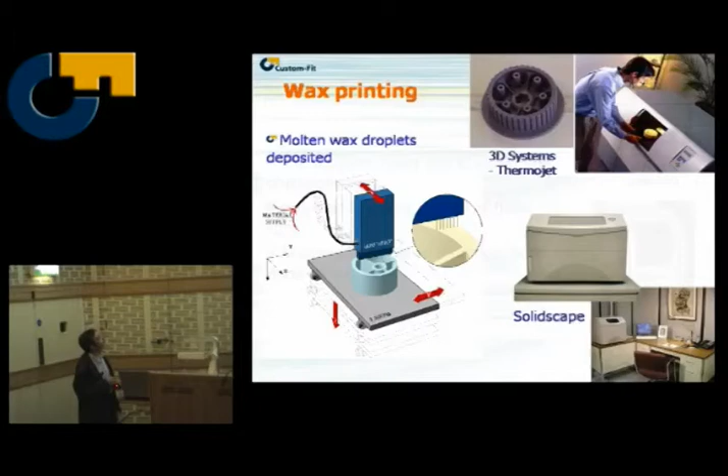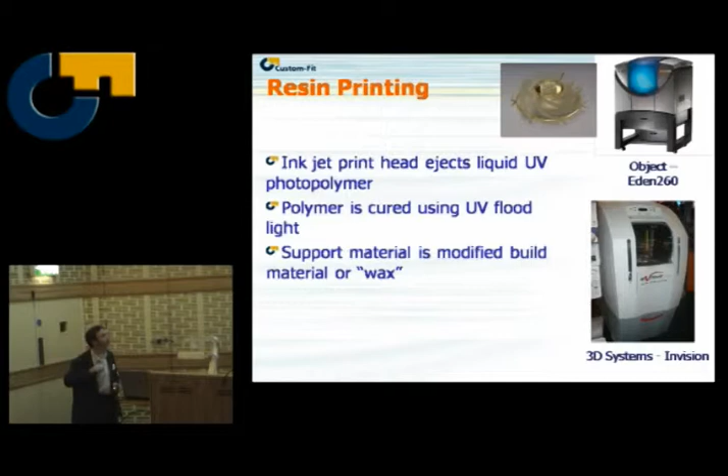Resin printing machines - there's a range of resin printing machines, both from 3D Systems and also from an Israeli company called Objet, no C in that title. That prints a resin but cures it with a UV light, so every time you print your material down, you UV cure it. The support material is a slightly modified resin, probably not wonderful on material utilisation.

Another process is the Perfactory machine. Some people doubt, is it a rapid manufacturing machine? Well, it can be - I think it potentially could be, because it's using a projection system to project a pattern of light onto this. You can see here there's an actual platform that's upside down, so the part grows upwards that way, and you feed more resin into this shallow vat as time goes on. So it's projecting an image, not dissimilar to the image on the screen, using a similar projection system to the one up there.

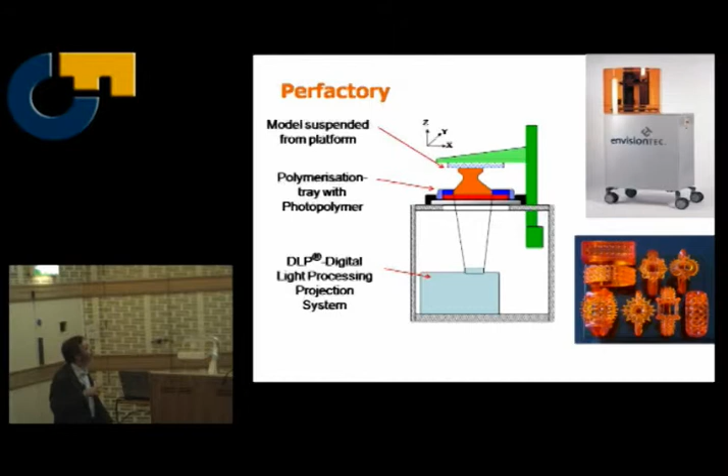It cures an entire layer one at a time, and it allows you to build multiple parts, very complex parts, quickly. There's a whole range now of materials being developed. If you're into casting jewellery, then it is a rapid manufacturing machine. If you're into making hearing aid shells for customised hearing aids, then yes, it's a rapid manufacturing machine.

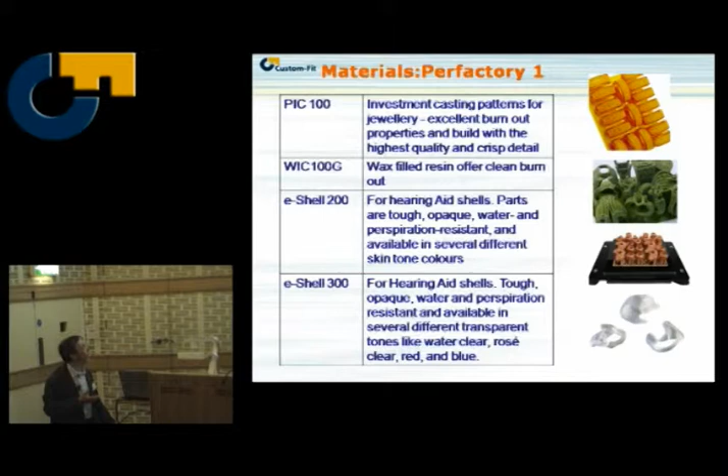They show examples also of larger parts. I will caution against this - my experience with the Perfactory process is it's great at small parts, but big parts, it's a disaster. Don't tell EnvisionTEC I said that, but I don't rate it as a way of making big parts.

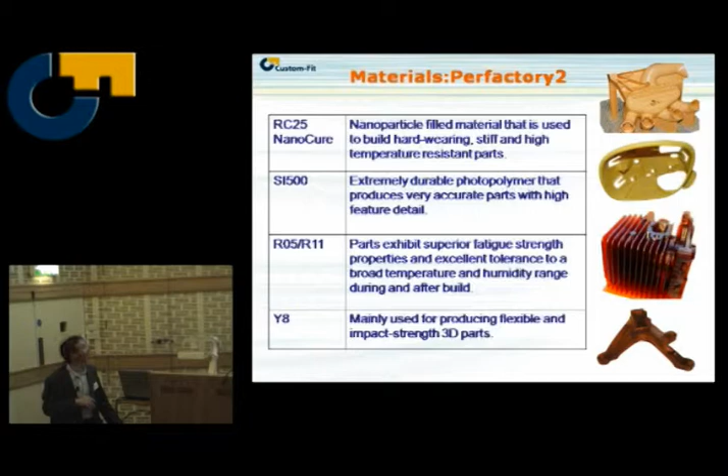We'll now quickly talk about the process being developed within the custom fit process. What we're trying to do is migrate from standard RP processes to faster, better materials, functional grading, to satisfy the requirements of rapid manufacturing.

The first process was actually developed by SINTEF, and Klaus knows more about this than I do. It's a process of metal printing.

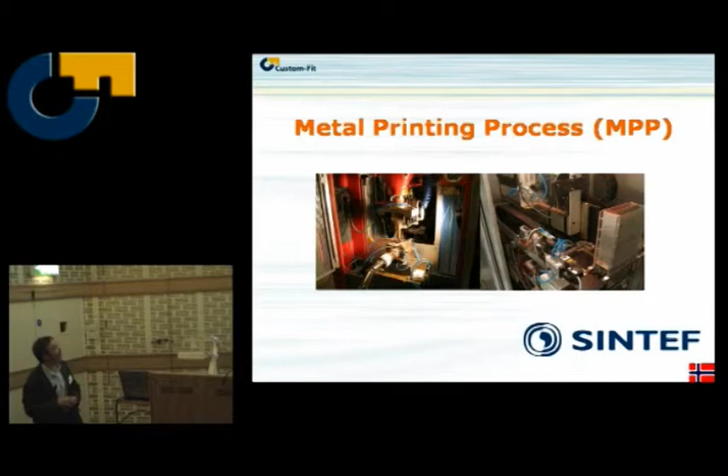The process works by taking a metallic powder and electrostatically printing it or picking it up onto a plate. You can see there, that's the powder, it's picked up onto this plate. That plate is actually a punch that pushes down into a furnace and fuses that layer in a few seconds. So there's your printed layer, there's the punch, and it goes into the furnace. It's an amazing process - a little localised furnace. The door whips open, in it goes, fuses, comes out, the door closes again.

It's an inert atmosphere in there, so you don't get oxidation, and you can produce a part that's a combination of - is this iron? Iron and copper. You name another process that can do that combination - not many, is there? We've got a solution to a problem we have to find, I think.

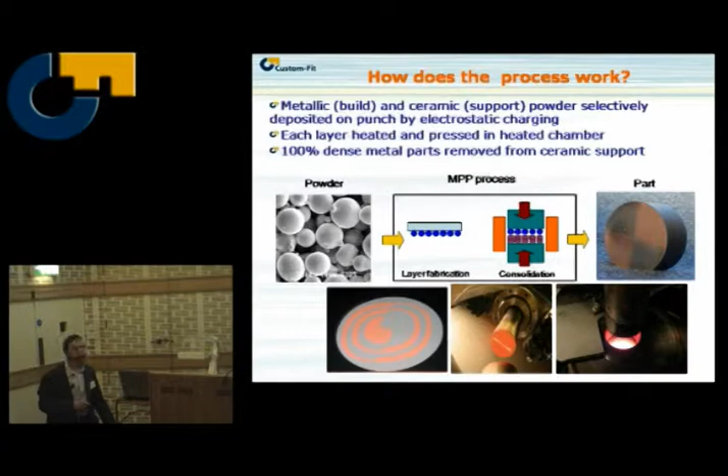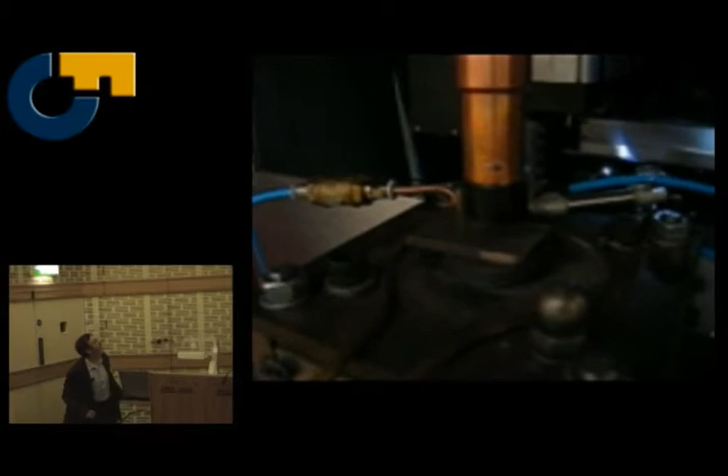This is the video. I've been told how to do this. And there's probably sound. You all see that? That's the punch, and in it goes.

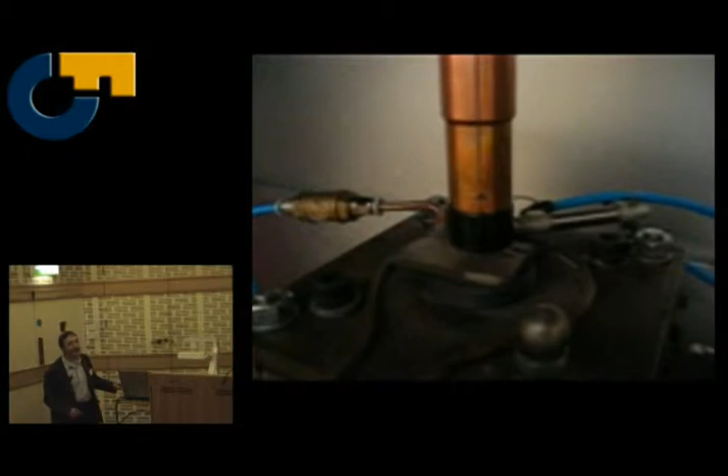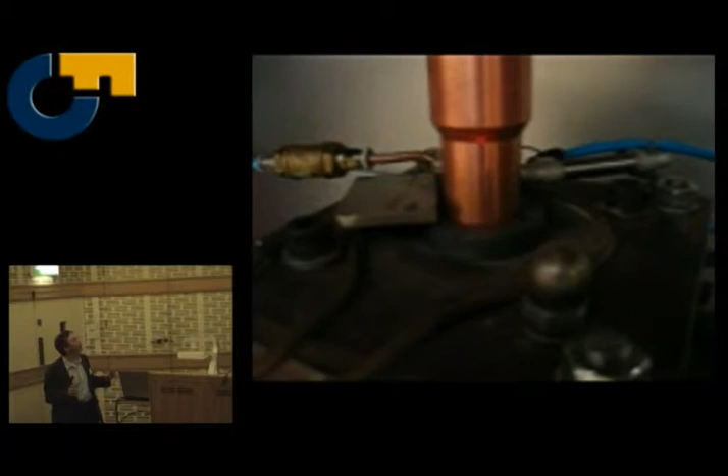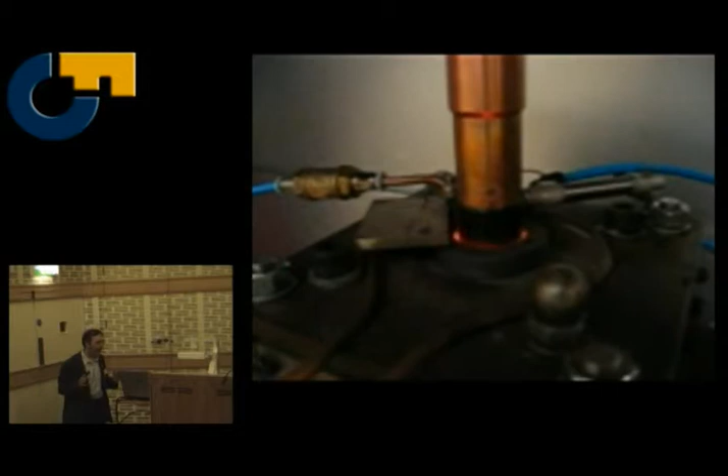It would be fair to say the process needs a little speeding up, but the principle is there. This is a demonstration, and this is not slowed down - this is real time. But the elements are all mechanical elements that can be quickly speeded up and then closed again. So that's a layer at a time. There's lots of discussion about whether it's better than laser sintering - it's a different approach, and it allows you to get functional grading.

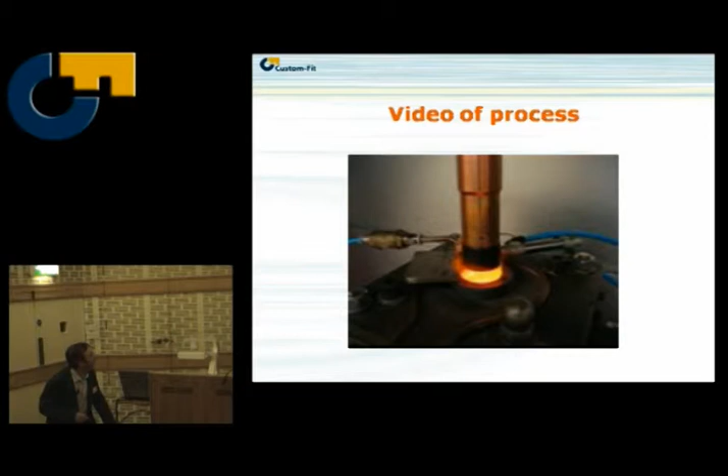Okay, so that's the sort of things you can do. There's been some materials research - Klaus will explain more about the material - but things like cobalt, chrome, titanium, iron, copper are materials which have been tested, and also this functional grading from 100% titanium to 100% cobalt chrome.

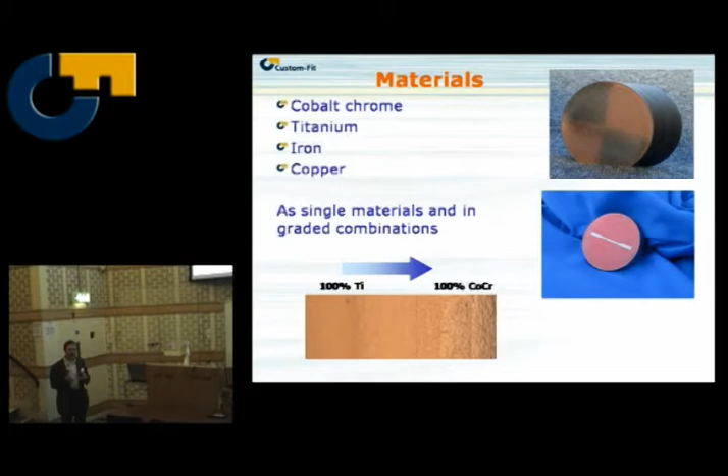This is something we've talked about, but actually now seeing it in real life - high viscosity inkjet printing from TNO, an organisation that Youngman used to work for. Very impressive machine.

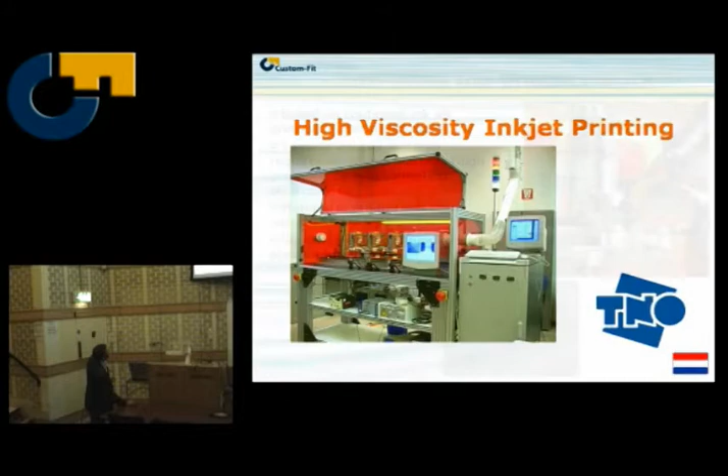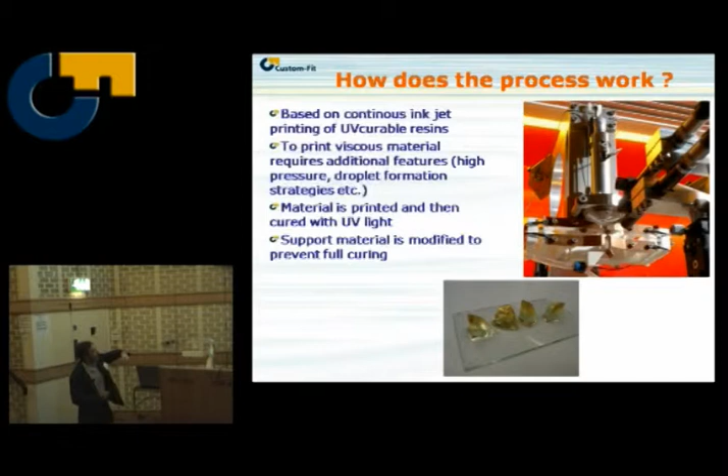What it does is use the continuous inkjet printing process, but with very, very viscous materials. One thing - and this is the critical part of the patent they have - it allows you, once you've printed this viscous UV resin, to then cure it to make samples.

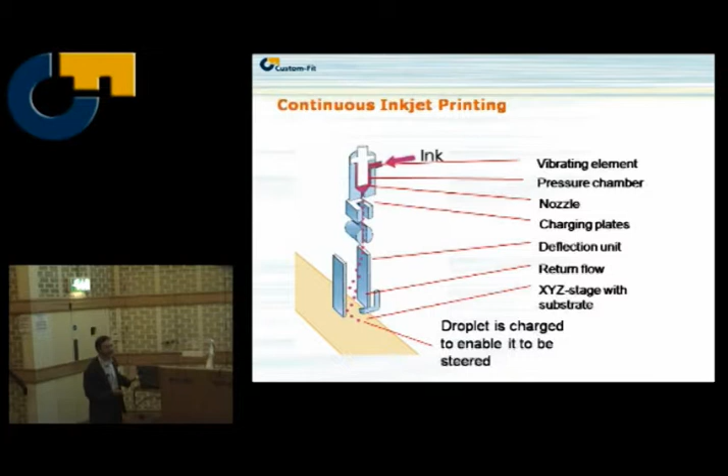For those not familiar with continuous inkjet printing, you can charge the droplets and steer them. It's a faster process than drop-on-demand, which is the standard desktop printing system. But it is quite technical - not easy. That's the machine, hopefully it will move forward.

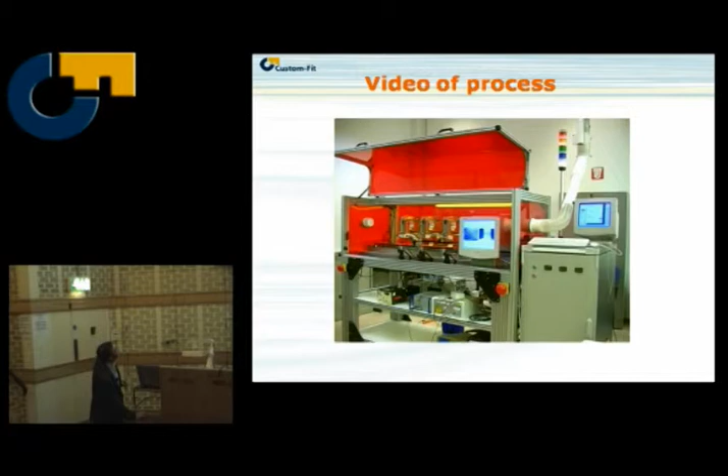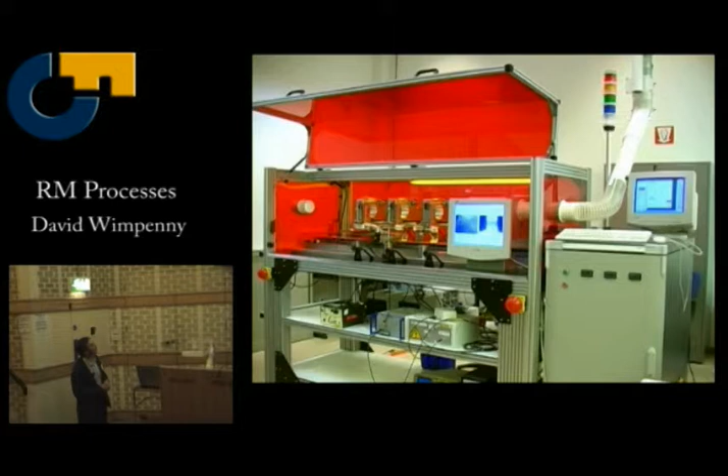Yeah, okay, that is real time. So that carriage is going backwards and forwards, going under 3 inkjet heads, and then it's curing and going back again.

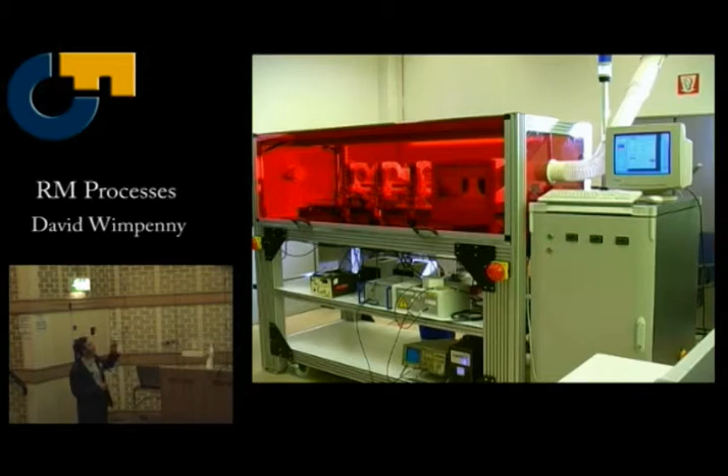This suffers from the problem of being too fast - you actually can't see what's going on. But there's a stream of droplets from every print head. The reason for multiple print heads is we want to be able to put down two build materials and the support material.

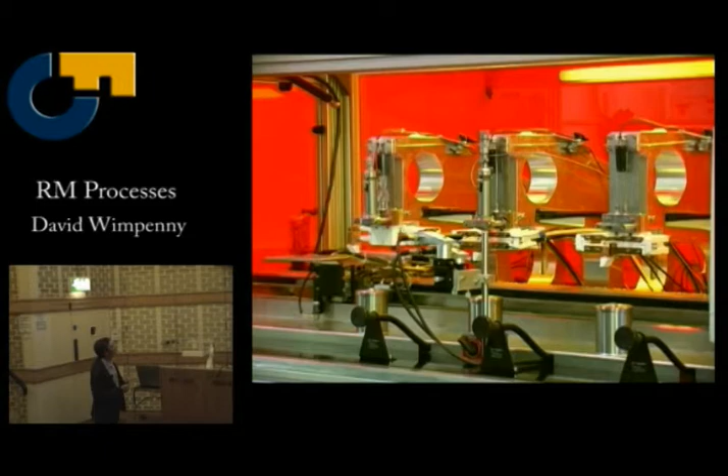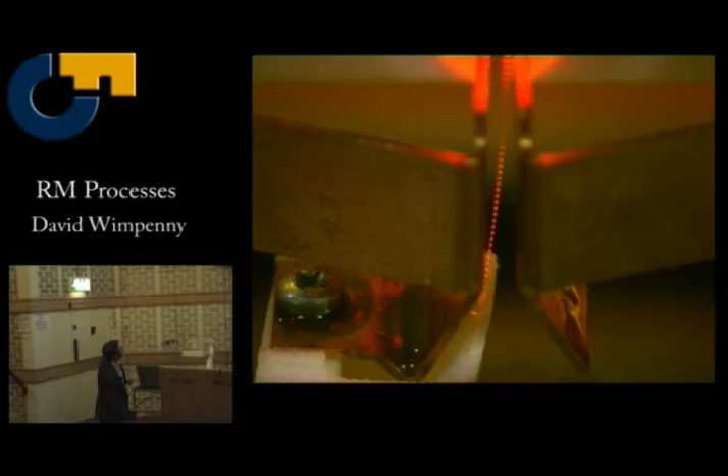That's been developed within the Custom Fit project. The critical issue is how they deal with this very viscous material, and they've got their own control software. That's the stream of droplets coming out of the head and how they steer it. As I say, it's not for the faint-hearted.

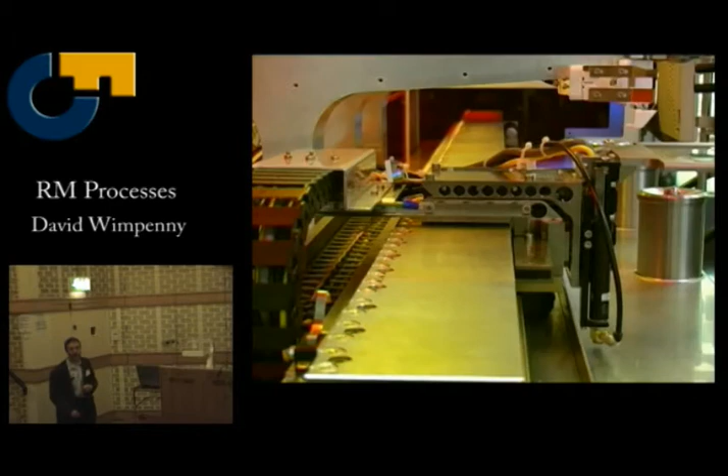Drop on demand is fairly simple - you squeeze a droplet, it flies and it hits the substrate. This allows you to do some fairly strange things mid-flight.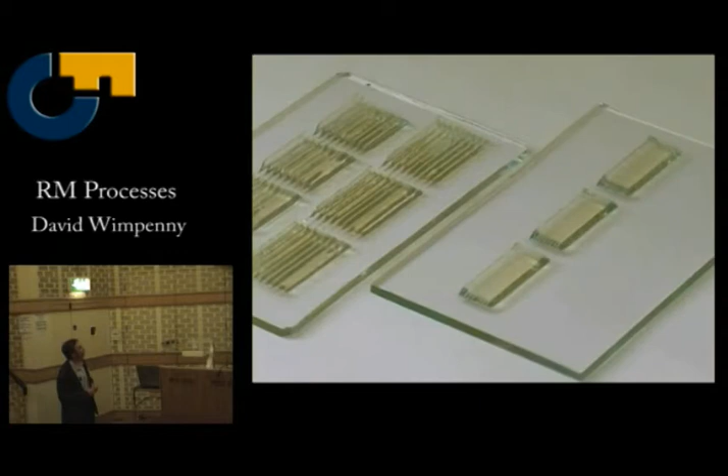As I said, the key is the process control. It's one thing to eventually squirt the material out quickly, but getting it in the right place - this perhaps doesn't look like much to you guys, but this is like landing a person on the moon in terms of rapid prototyping.

Okay, I think that's hopefully it.

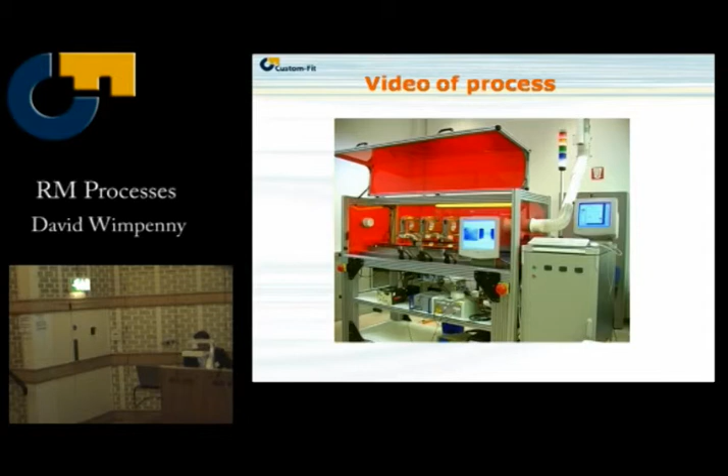Right, and those are some of the initial results. Not huge, but okay - at least they look like the thing that they are.

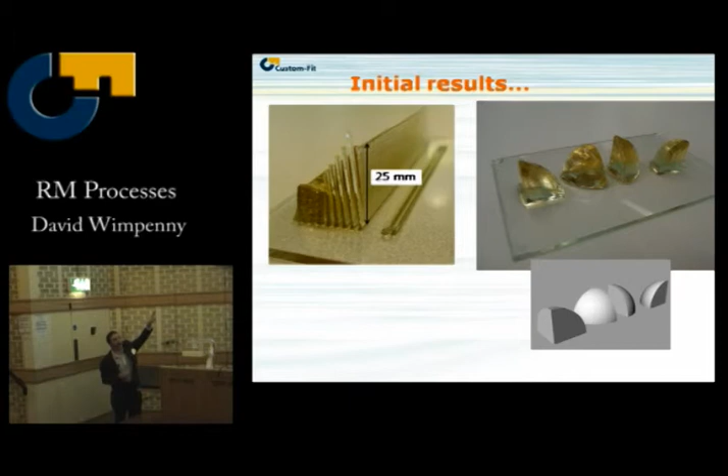I think they did the CAD first, then made the models - they didn't make the models then try to get the CAD to match. So I trust them, there's no cheating going on here at all.

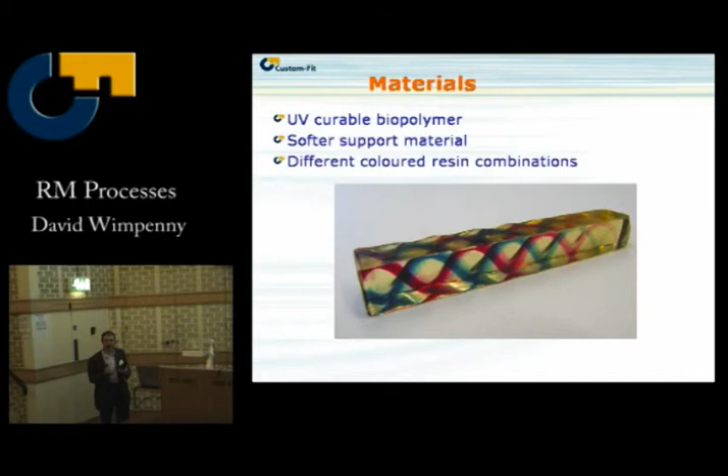And as you've seen before, the ability to combine materials is there. Again, we have to develop the applications, but it's a unique capability of this machine.

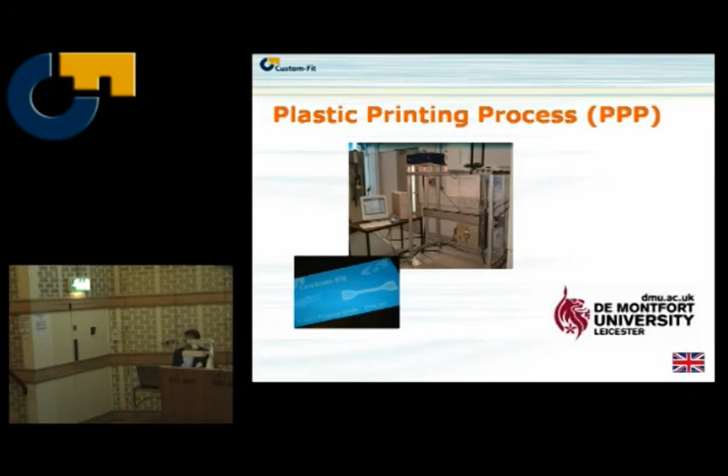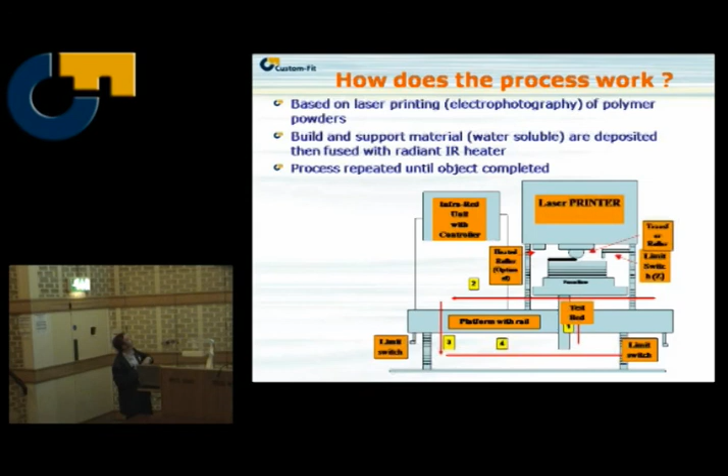The last process is one we're developing at De Montfort University in conjunction with our partners at MCP and CTG. It's plastic powder printing, based on laser printing. The idea is you have a laser printer, you effectively print the surface down, and then fuse the whole area with an infrared radiant heater. So it potentially could be quite fast.